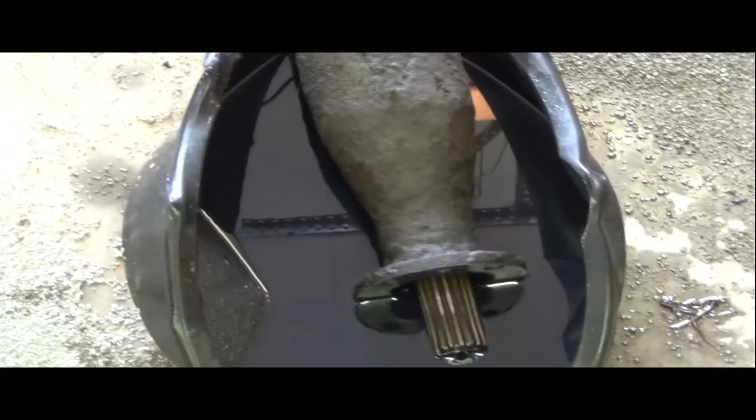Alright, it's a new day, and this has been draining for a while overnight, and that has now filled up the pan. So we had a ton of fluid inside of that torque tube, that's for sure. I thought a lot came out yesterday, but clearly there was more yet to be had.

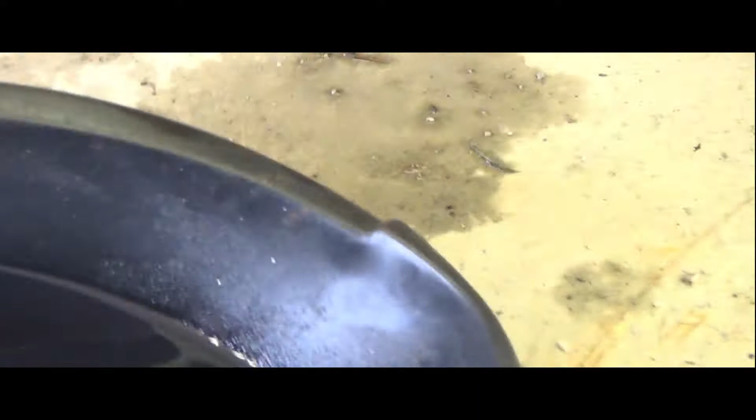I'm not exactly sure what type of fluid it is. It's thick enough that there's got to be differential fluid mixed in there with it, but it could be a combination. So anyway, that's really not what I'm going to focus on today, though.

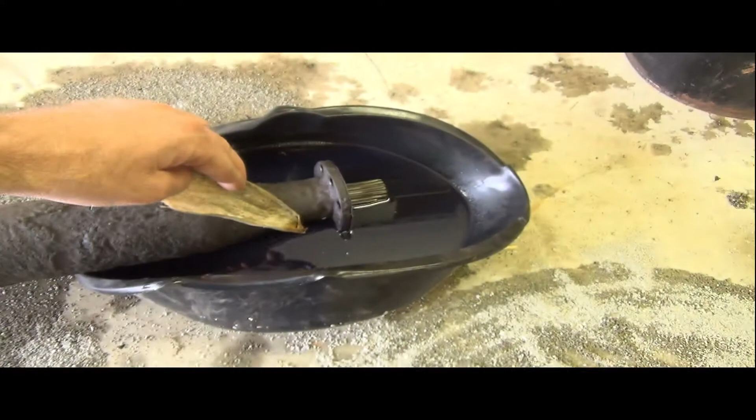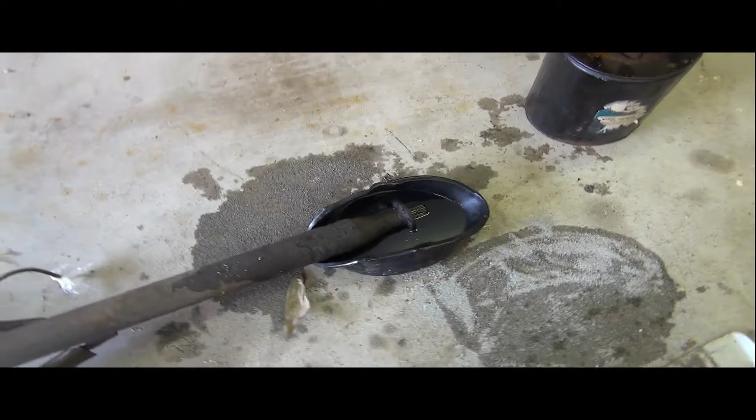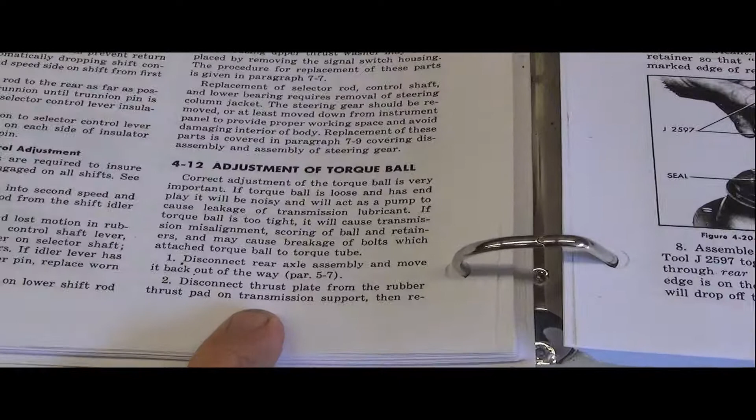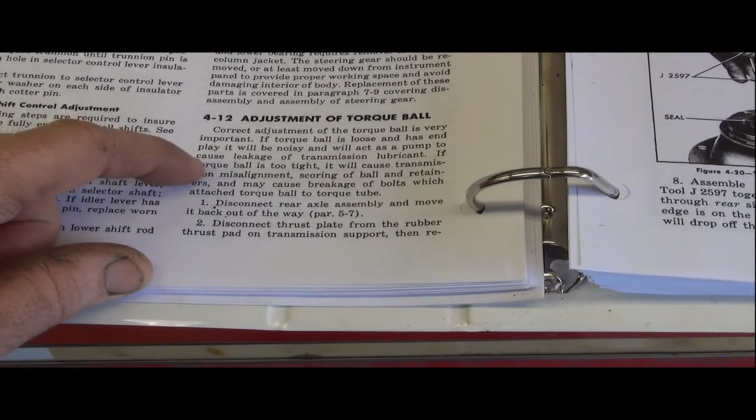At least at the beginning here, we're going to start off with looking at the torque ball. I've got the seals for that. I want to run the car in drive and have it run for a while and see exactly what those seals are doing at the back of the transmission. I should mention that the manual reminds you pretty strongly that the correct adjustment of the torque ball is important. If it's loose and has end play, not only would it be noisy, it says it will act as a pump to cause a leakage of transmission lubricant.

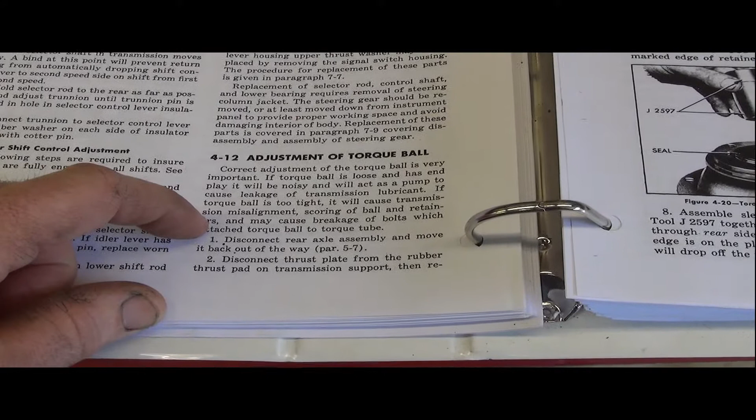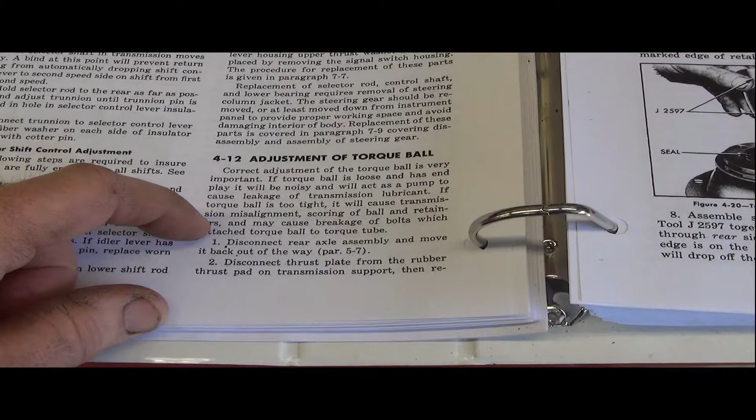So anyway, it's got to be right. I'm going to go start up the car and warm it up a bit, and we're going to put it in drive and watch the transmission spin if I can, and see if that doesn't induce some kind of a leak or give me some type of view of the seals before I start working on them.

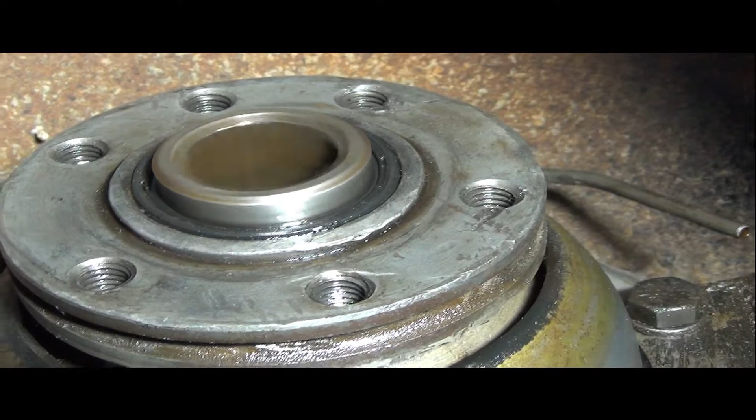So there you can see I'm in drive. I've got the transmission spinning around there a little bit. I'm not flexing the torque ball or anything like that, though that would normally be part of your operation while you're driving.

So far, not exactly a smoking gun. Then again, the transmission was a little low, so I'm going to top up the transmission and see if that doesn't change what's coming out of it right now.

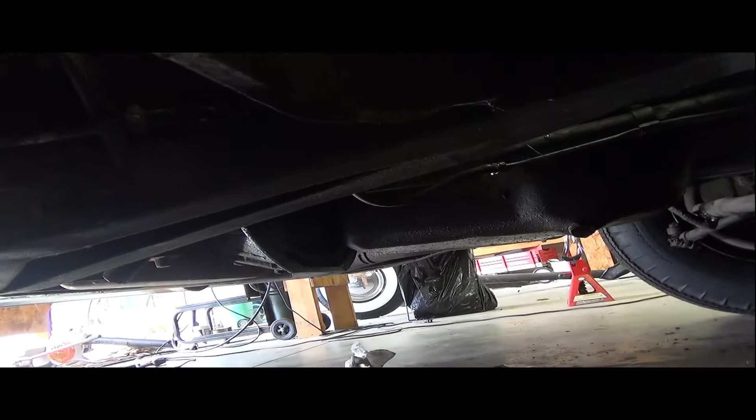Well, I haven't had any leaks or anything like that coming out of the back of the transmission, whether I'm in drive or not. I've been filling up the transmission and just kind of playing around with the level, and I'll run it for a while, then add some and run some, and add some for a bit. So I haven't really caught any smoking gun of transmission fluid coming out.

No, that's not a true running driving test, because the torque ball is normally flexed right and left and up and down while you're driving, and depending on where it's flexing, that may absolutely change whether or not it's going to seal well.

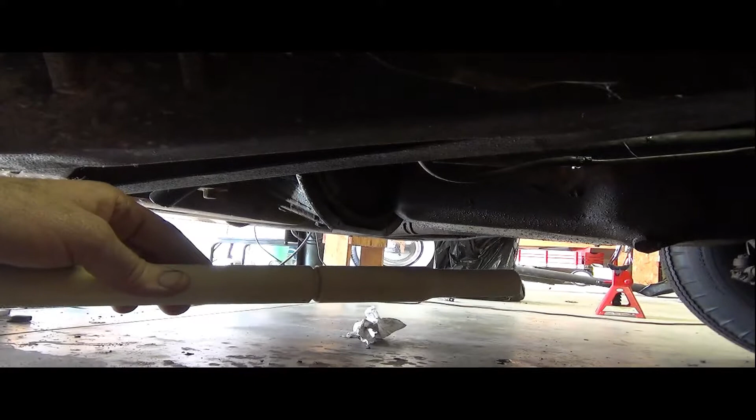I went ahead and fashioned this club that they recommend making in the manual, on the wood lathe. Oh my goodness, it has to be a 1-inch diameter on the end, and then at this distance here out on the end of the club, with your torque ball installed, you pull and see if you can get up to about 30 or 35 pounds of pull on the torque ball before it moves. So I'm going to go ahead and just move that torque ball around a little bit with this club and see if I can get it to leak, just for curiosity.

I'm still going to wind up changing the seal, whether or not it's a leaking seal. It would be disappointing to find out that all I needed to do was be more patient and keep adding more and more transmission fluid to it. But anyway, we'll just go ahead and keep going with this, because again, you really can't tell if it's going to leak until it's actually hooked up to the torque tube and being flexed. But let's try this anyway.

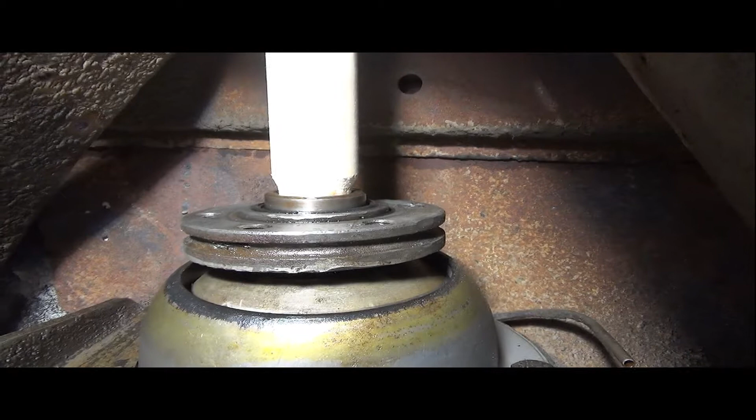So there's not much room for me to film under here, but as you can see when I move this around, it's certainly not smooth in there or anything of the sort. It kind of jerks and moves around a little bit. I couldn't tell you, I don't have the feel for putting my hand here and pulling down and seeing if that's 35 pounds of pressure or up to.

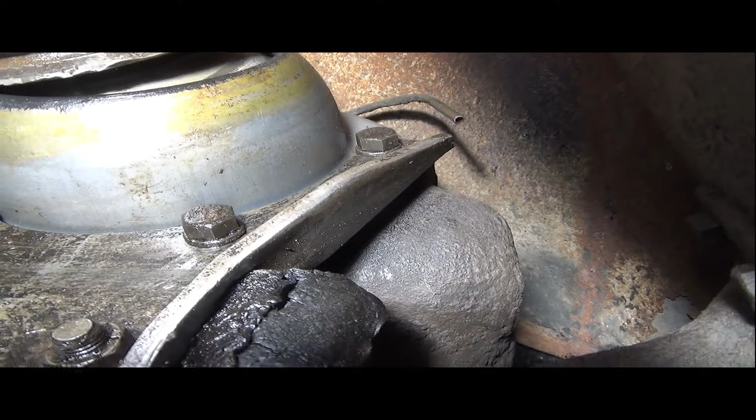That might be a little tight. Not exactly smooth. But anyway, let's change the angle a little bit here and see if that has any effect whatsoever.

Sorry, I wasn't paying attention, I was looking rather than videotaping. We'll move this around a little bit here, and then I'm going to turn it on, start it up, and see if it causes any type of leak or anything like that.

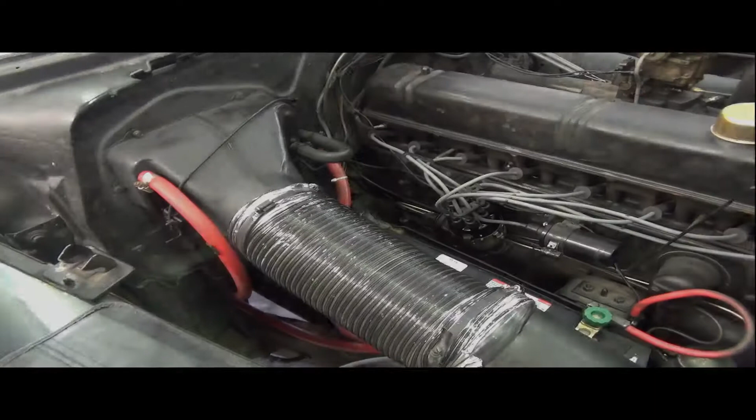Well, the end result was it was keeping hold of the transmission fluid, and I never was able to reproduce a leak. So, nonetheless, since I have new seals and I'm this far into it, I've got to go ahead and replace this torque tube seal.

And then we'll move on to addressing the somewhat important problem of this rear differential leak going down into the torque tube as well. So in case it wasn't leaking, or in case I should have just kept putting more oil into it before, at the very least I can address this torque tube differential leak and feel better about that.

Alright, for adjustment of the torque ball, disconnect the rear axle assembly and move it back out of the way. Well, that's easy. Alright, disconnect the thrust plate from the rubber thrust pad.

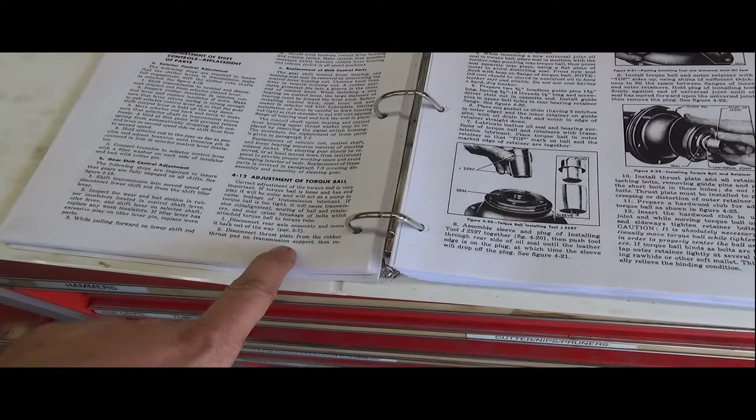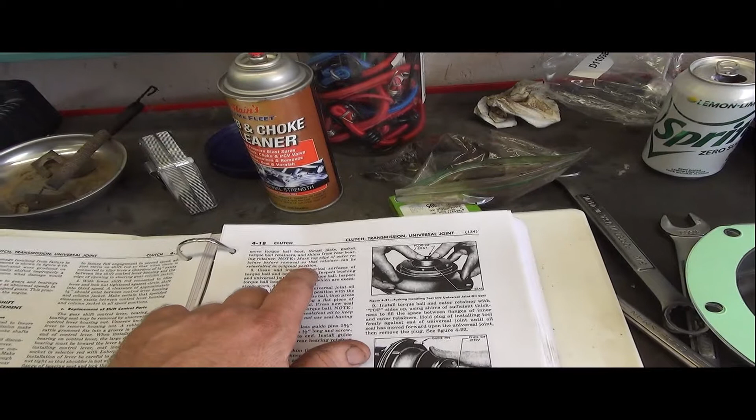Then you remove the torque ball boot, thrust plate, gasket, torque ball retainers, and shims from the rear bearing retainer. They recommend marking everything so you can put it back in its original position. Of course, I've got some new parts to put on here as well.

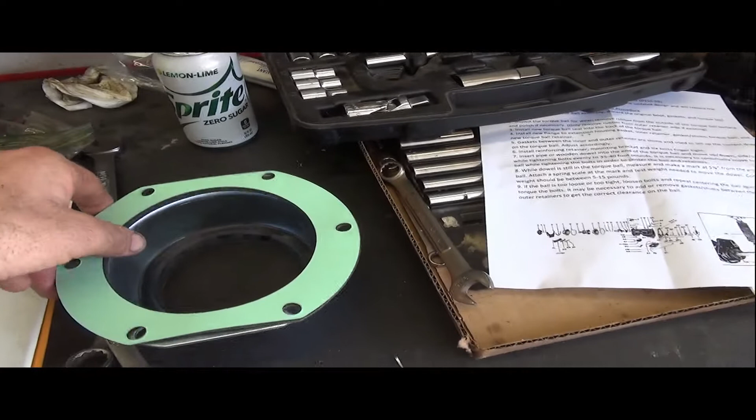These are shims. I think there might be multiple shims here depending on what thickness you need. And they updated, I think they got rid of the boot, and now they have a different type of seal right there. So that's an upgraded system.

Alright, let's get to taking some parts off. Sorry that I'm working sideways again, there's just no room though. So these are different bolts and nuts here. I'm going to go ahead and take those off. Then we'll move on to these guys here.

Alright, 3 special kind of rubber bushing nuts removed. Now let's get on the rest of these. 1, 2, 3, looks like probably 6 all the way around there.

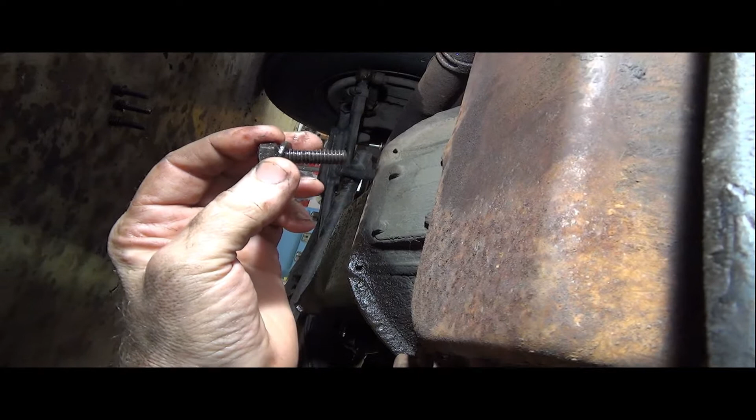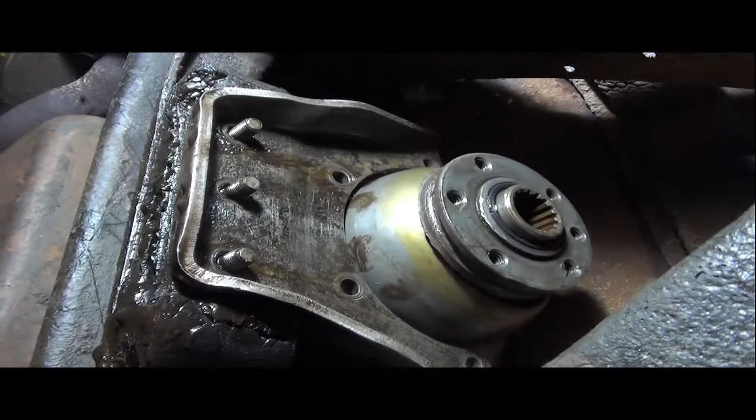So these here are 4 flange bolts, and I'm kind of keeping these separate for a moment. Here's 1, 2, 3, 4 holes around there. There's 2 more bolts on the top, but I'm not sure if they're the same length or not, so I'm going to segregate these out for a moment until I'm convinced every one of those bolts is identical.

So I just pulled the flange right off there. I'm just going to pull it over here to show it. Maybe they call that the thrust plate. It's a pretty substantial plate.

And now I'm going to remove, there's 2 more bolts on top there that you can't see, and I just want to see if those are the same length, the same bolts as the 4 below it, in case I have to mark those and keep them separate. So just for documentation, all 6 bolts around that housing are all the same, you don't have to treat them any different one for the other.

They're all identical. So now we're going to see if we can get the rest of these parts to slip off here. So I'm going to see just how loose this is. Pretty loose. I won't be able to one-hand this and videotape it at the same time, but I'm going to go ahead and see if I can slip this all off as one assembly and keep the order of things while I do that.

So mostly for my own memory, this housing right here can come right off, slip off before the rest of it. So I'm going to go ahead and do that now, and put that to the side.

This looks like it is about to come off. Let's see if we can wiggle it around.

Alright, I'm gonna put the camera down and see if I can get this off. Just wanted to show you that's the part I'm struggling with. I'm almost off that shaft, but I've got to wrangle it off here, and I can't do it one-handed. I've almost wrangled this off, it's being very stubborn on that last part.

There's another plate and then another shim behind here as well, so I want to keep track of this orientation. I'm gonna twist and play with this to see if I can get it to slide off fully, but it's being pretty stubborn.

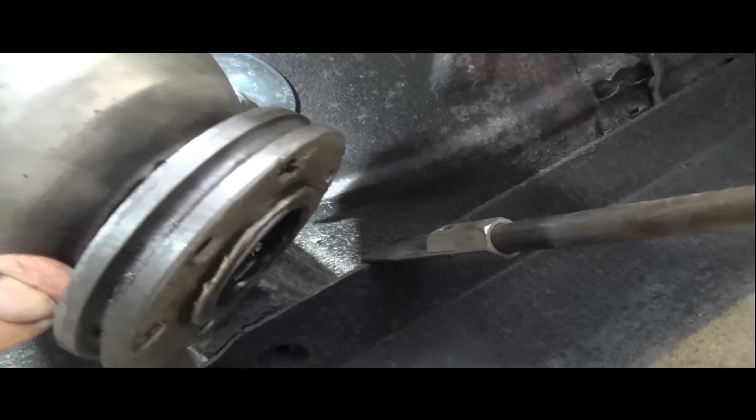Just FYI, I wound up using a slide hammer to finally pull this guy all the way off of that shaft. It was not gonna go very easily.

So here's the rest of the torque ball. With that housing removed, I can go ahead and lift this off, and there's a shim kind of coming off with it, partially.

And there's the U-joint coming off of the back of the transmission.

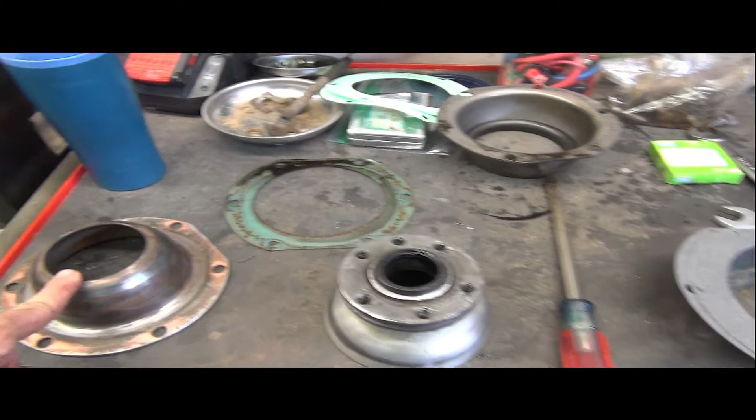Okay, so this is what we got now. So here was our, I think they're going to call this the inner retainer. I have polished this up a little bit there. You can see that wearing that is on there. There was actually this guy here, actually a couple of these, I think, that were on the inside behind this here.

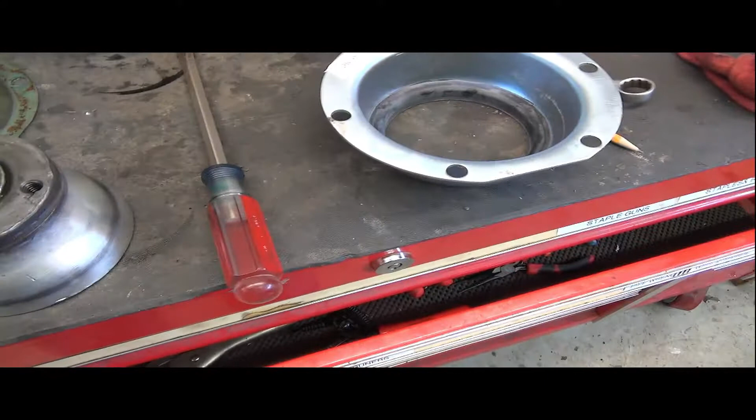I don't believe that's correct. I believe that should have been one gasket, like this. Hold on. Underneath, should have been followed by another gasket, and then one or two shims, depending on how many you need.

Let's see here. Torque ball. And retainer. Like that.

I've already popped this seal out here, and we'll be putting a new seal on there on the bench. I hope if I put this on, I can get it back over that tube. It really was pretty tough getting it off.

But anyway, let's just kind of reverse this for a moment. So that was brand new. This will be the new part going in. Old part, I did polish that, you can see how it was. They recommend polishing it if you need to get rid of any old rubber or anything.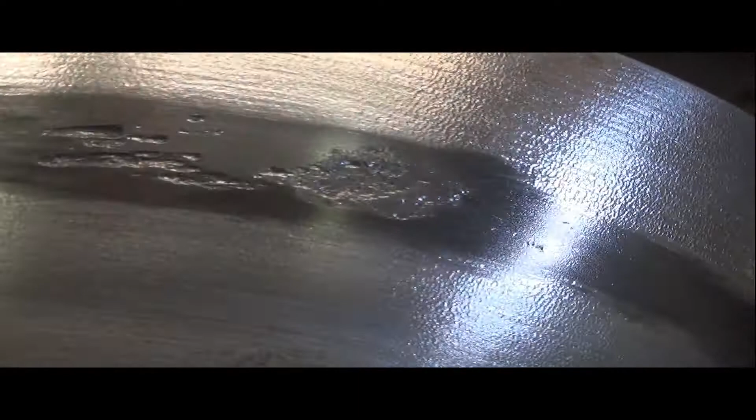Not exactly thrilled with that. I don't know if you can see that very well or not. That's some scoring and some other things that have happened there at some point in time. Can't really tell what was going on there.

But there's also not much I can do about it, so we'll just go ahead and keep using that. You can really see right here how someone was kind of pounding on here at one point in time. I don't know if that was to get a replacement seal like this one on there, and they just got a little carried away. I'll be using a flat board or something like that to pound mine in when I'm done.

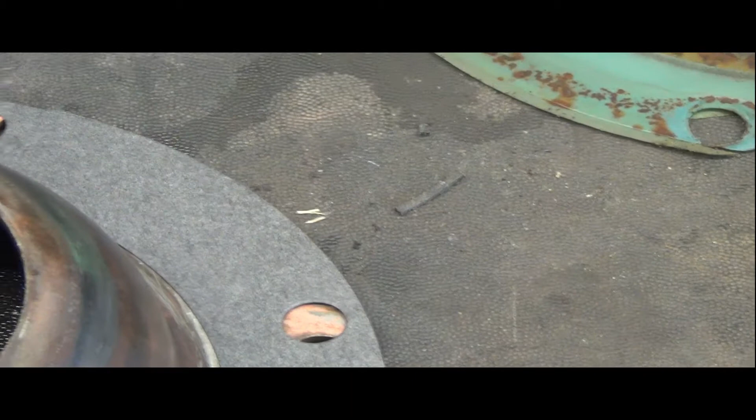But anyway, these again are the adjusting shims that you'll use to get your thickness right with the inner and outer gasket, I think that is the proper way to do that. So anyway, let's see if we can get that seal put on there.

Okay, I'm going to spend a little bit of time cleaning up this surface right here on the inside. I can't videotape any of this because I'll be spraying cleanser all over and I'll kill my camera.

Of some interest right here is the speedometer cable sticking off to the side, I do believe. And I always kind of wondered, you can just see that little gear right in there and some threads catching those teeth off of the U-joint, and that's what's transmitting your speedometer information.

Ironically, I bought a new speedometer cable because the other one was noisy. But now that the oil has really set on the cable, when I was in drive and running it up and down the gears, it was actually very quiet. So I'm not really sure if I even needed to replace the speedometer cable, but I'm going to go do it anyway because I got one here.

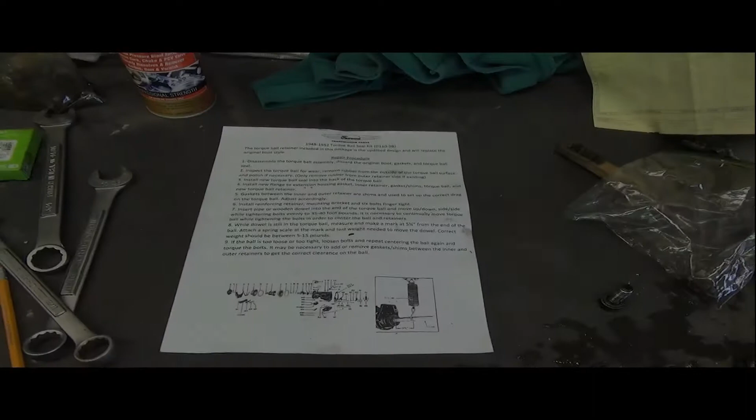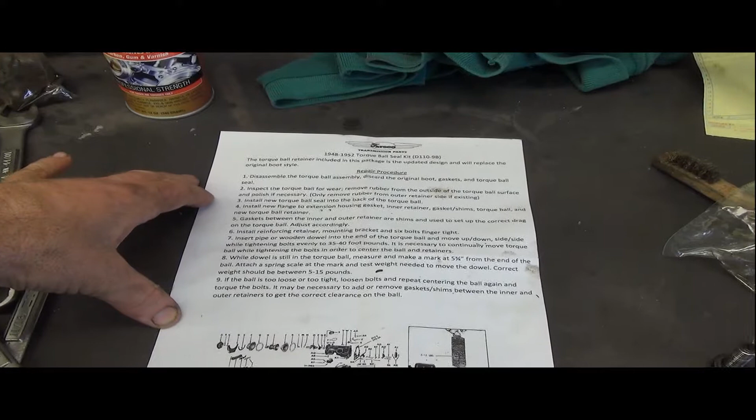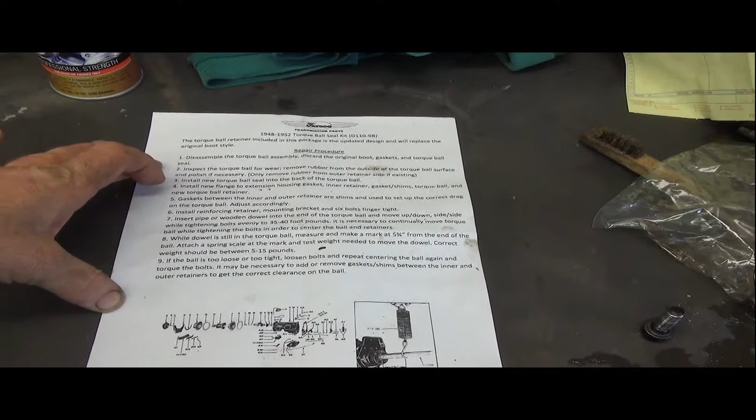They do send you a piece of paper here that just kind of goes over what you should be doing, because this is updated from the original torque ball repair kit. And again, it says here, so there's gaskets between the inner and the outer retainer. So here's the inner retainer. Hold on. This one's the inner retainer. This one's the outer retainer.

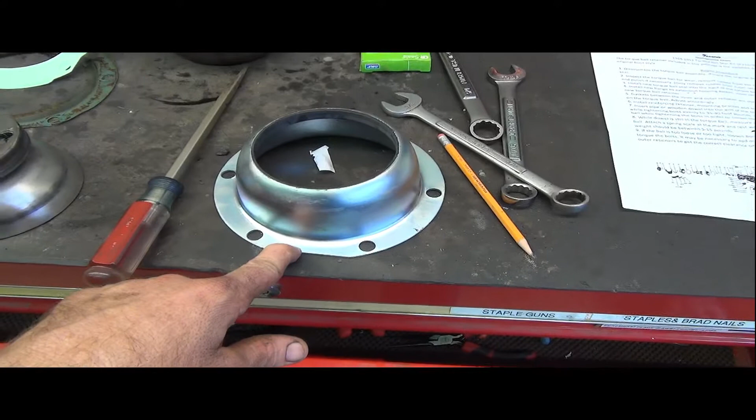And again, the gaskets between the inner and outer retainer are shims and are used to set up the correct drag on the torque ball, kind of reinforcing to me that I need to have a proper gasket on one side, a proper gasket on the other side, and then we'll adjust how tight or loose this torque ball is on there with these paper shims right there, in addition to that gasket there. I'm hoping it takes at least one gasket for the proper tension.

And it does talk about putting the new seal on the back of this torque ball prior to installing. So hopefully I can get that on there and then still get that popped over that U-joint propeller shaft connection there, because it is a very tight connection. So I'll be cleaning this out really good on the inside here to make sure that I don't make things any harder for myself.

That seal was a booger, and it took a press and some flat metal to actually manage to ever get it down in there. It went hard. I can see why they were getting frustrated here if they were doing it without a press.

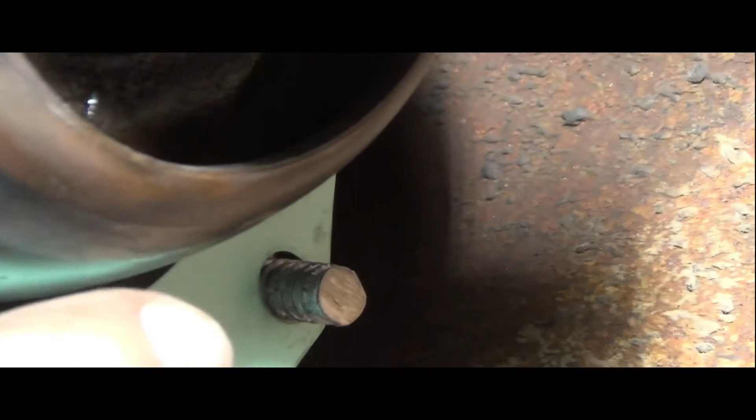Okay, so I've got my assembly on here. I was able to get that mocked up, and if you'll notice up right there, that little guy there is a headless guide pin. I just took a bolt. There's one on the other side too, and cut the heads off of them and stuck them in there, and that way you can hang your assembly up there without it falling and trying to jack with all the other bolts at the same time. And that was the manual's idea, not mine.

So I can see already that the challenge is going to be to slip that outer ball retainer over this, because remember, there's a very tight seal on there. I've already put it up there once, and it's just going to be very hard to squeeze over that. I'm hoping that I can just lay it up there, get some bolts started, and start to cinch it down using the bolts, because I'm now suspect. Let me see if I can show it.

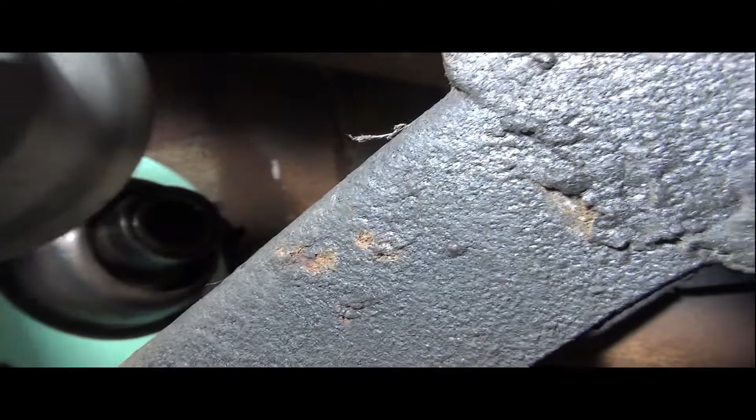So this guy has to go on here next, and it's a tight fit, and that seal that we just pressed on there, that lip is way over that as well. So that is going to be hard to get that back on there. Hopefully, if I was to put that other ball on there, I might be able to. I don't even want it to come off. I need to get that lubed up a little bit before I try to go putting that back on.

But yeah, we'll see if we can get that to squeeze back on by using some of the bolts to do the squeezing for me. I'm afraid what was done before was probably they got this on here, realized how hard it was, and they started hammering on it, and that's the reason that you see those hammer marks right there. So anyway, let's see what happens.

So fortunately that worked. Just running them up fairly tight was able to pull that rubber over that shaft, and it went over with kind of a thunk. It was definitely tight, and hammering was not the way to go. You need to just pull it over and cinch it up.

Now what I'm going to do is I'm actually going to back these bolts off, all of them I think, or almost all of them, or loosen them up. You have to put the flange back on here, it says, while you're tightening up this stuff. And I took a guess that it's going to be one inner gasket, one outer gasket, and I've got one shim on here.

We'll see how that works, because what you do next is as you tighten all this stuff up, I have to put my wooden club I've made in here and kind of tighten and wiggle and tighten and wiggle and get it on there as good as you can, but not get it too tight.

And I may actually have to remove this again, which I'm not looking forward to, but if you have to, you have to get rid of one of those shims there, like that green one I just put on there right there. We'll see. I got one more shim in addition to it, but I'm not going to use it for right now. So anyway, let's get to reassembling this a little bit and tightening things up and adjusting.

Just before I started tightening everything up, I realized this guy had gotten spun around. That flat edge is supposed to be down here with the gasket. Not happy that I almost missed that, but at least I caught it now.

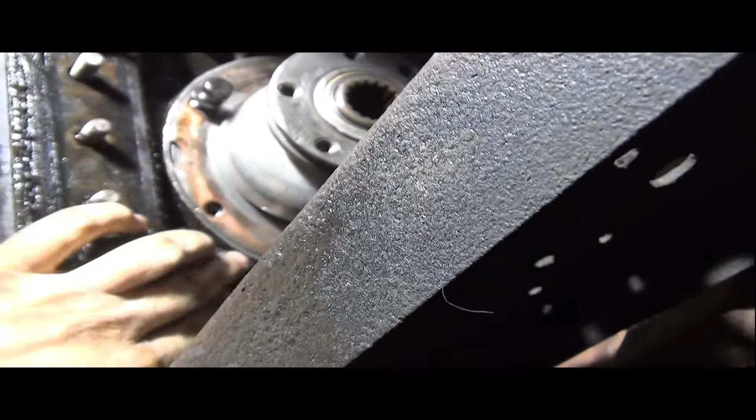Better than later. All right, rechecking and double checking myself, making sure that this notch, which has a gasket behind here, so don't think it's just open and draining here, but they do call that an oil drain hole. My goodness. And maybe if you have a leak, it's supposed to come out there. I don't know. That's supposed to be down. There is a gasket behind there. I'll put a gasket over that, and then a shim, and then the retainer, and make sure that everything is lined up as it's supposed to.

All right, take two. All right, now we got everything properly lined up. Got my flange on. All the gaskets are on and lined up. Hopefully the number of shims that I picked is actually the winner. I guess if I have to, I'll take it apart again. It's not that bad.

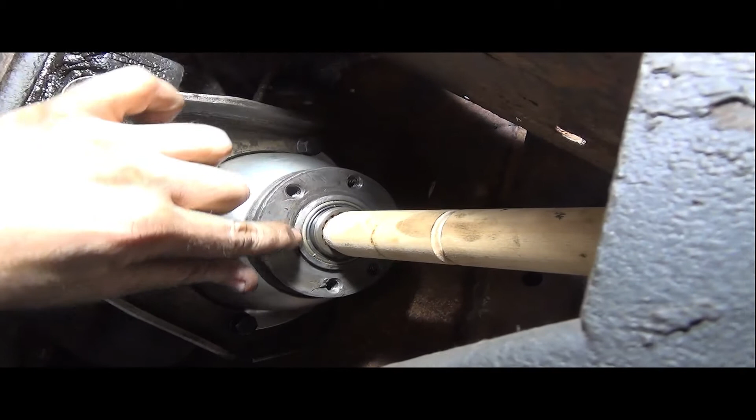It turns out that the original time that I took that off, because it had been hammered, this edge right here had been curled in, and that was, I think, part of what was... well, I'm not exactly sure why it was so hard to get off there, but it turns out that you could push it on by hand. So that seal isn't that tight against there. It's pretty tight, but it's not as tight as what I was afraid it would be. Anyway, so

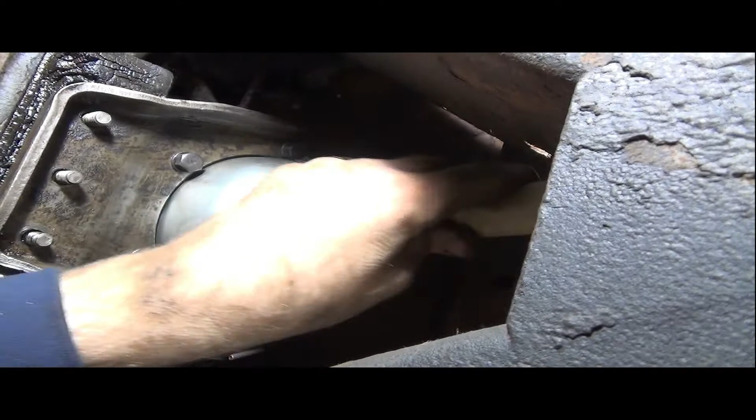35 to 40 pounds of torque on each one of these bolts, round and round and round, loosening this up all the while as you're going to get it very evenly centered. And when you get to 35 or 40, hopefully you have... it says actually about 15 pounds of pull in the new kit that I got. So we'll see how this goes.

So we've got it in there, and that's about at 15 pounds of pressure, which is what my new guide is there. I like that. That has plenty of chance to move around, but it's not too tight. So very good, very good. So I'm going to run it again, make sure it isn't leaking anything, and then we'll call that good for the day.

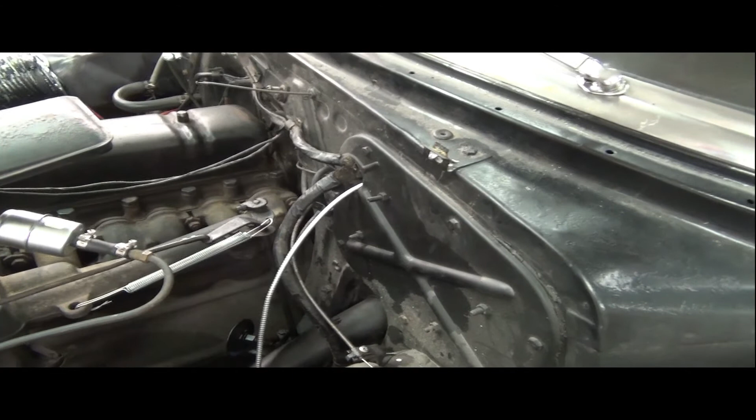Well, I thought I'd be done, but I had time for one more thing, so I thought I should do it since I had a part come in. That's new speedometer cable there. I chipped away at, there's a rubber grommet there in the far wall that was actually pretty hard to get through. And then here's the old cable that I had passed through. It just literally unscrews out.

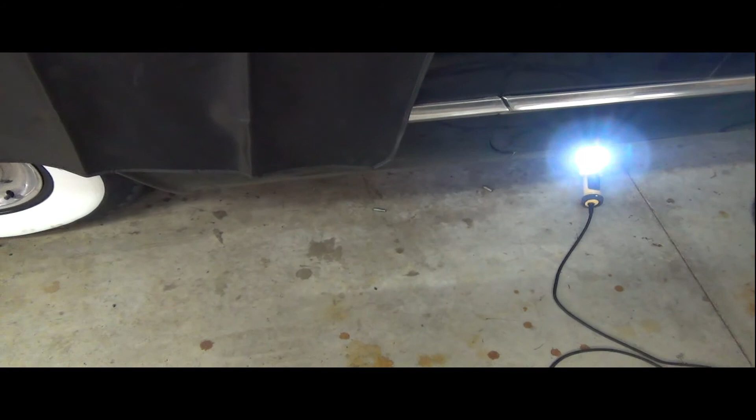This just unscrews out of the head of the speedometer in there. And then I'll go underneath here and screw the end of the cable into the automatic transmission. And that's all there is to that. It's pretty easy.